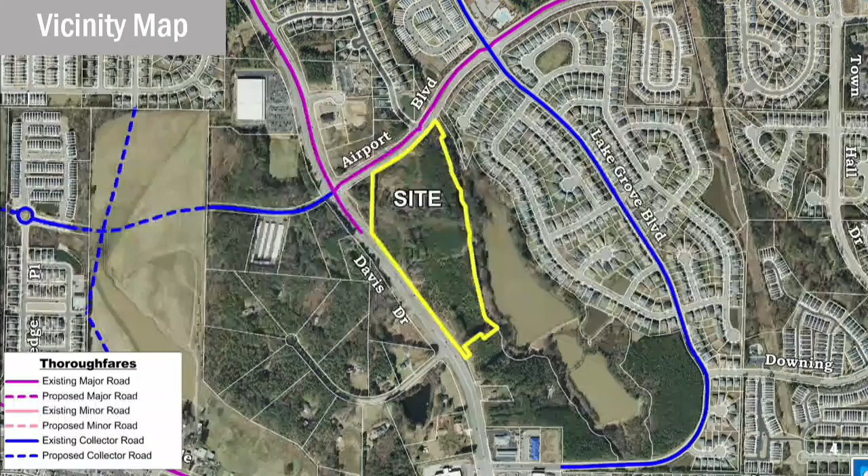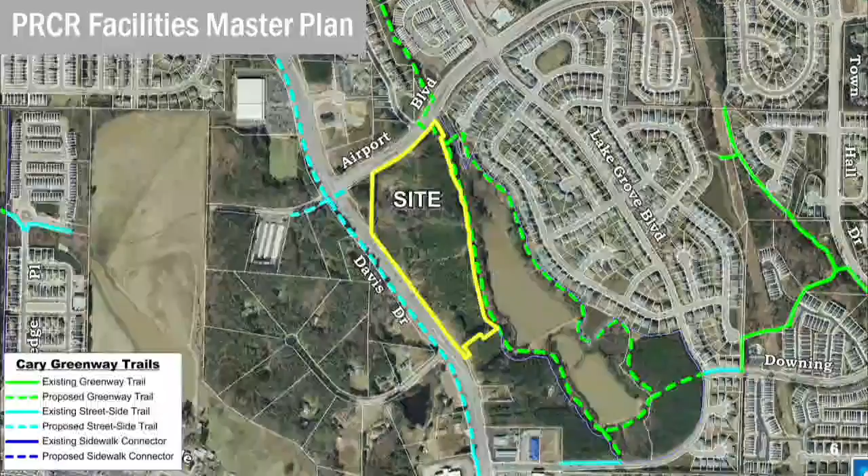The Parks and Rec master plan shows a future greenway on the adjacent property, the town-owned property. That's not constructed at this time. The site is located in the Twin Lakes PDD. The subdivisions to the east and to the northeast are also located in the same PDD.

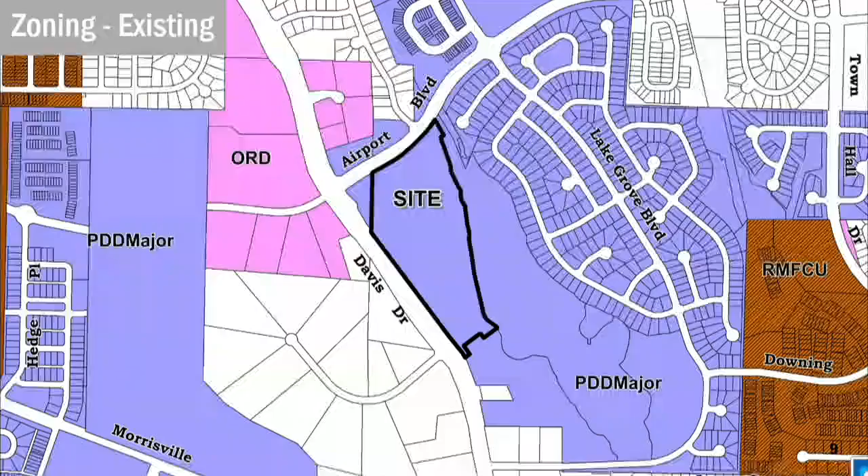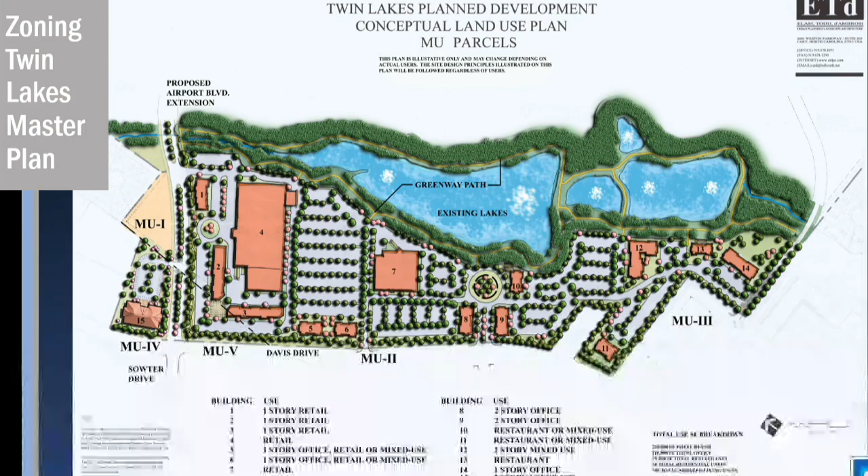This zoning designates 5 mixed-use parcels, MU1 through MU5. The subject site that we're looking at tonight is located in MU2. This conceptual land use plan suggests mostly retail for this site, also suggests some office and mixed-use space on that plan as well. This is a conceptual plan, and you will see some differences between this plan and the applicant's sketch plan once we get into that.

The PDD further outlines some use allocations up to 250,000 square feet of retail space for all 5 MU parcels, mixed-use parcels, an additional 110,000 square feet of office, and 25,000 square feet of restaurant, which it separates out from retail, is allowed in the total, all 5. No building shall have a footprint exceeding 150,000 square feet, a maximum of 4 standalone restaurants, and up to 50 apartments or condominiums, or 150 assisted living units.

What the applicant is proposing is 158,300 square feet of floor area, all non-residential. There are no residential units in the proposal. That would be 63%, slightly over, of the retail allocation from the Twin Lakes PDD if it were to all develop as retail, and right now some of the spaces are speculative. That would be 41%, or just over, of the total floor area, the total non-residential floor area permitted in the PDD. Again, there are no residential uses.

It could include up to 2 standalone restaurants, just depending on how the building is configured. PDD allows 4. And for your reference, the acreage or the size of this MU2 property, mixed-use 2 tract, is about 22 acres, which is about 56% of the total area of all 5 MU tracts.

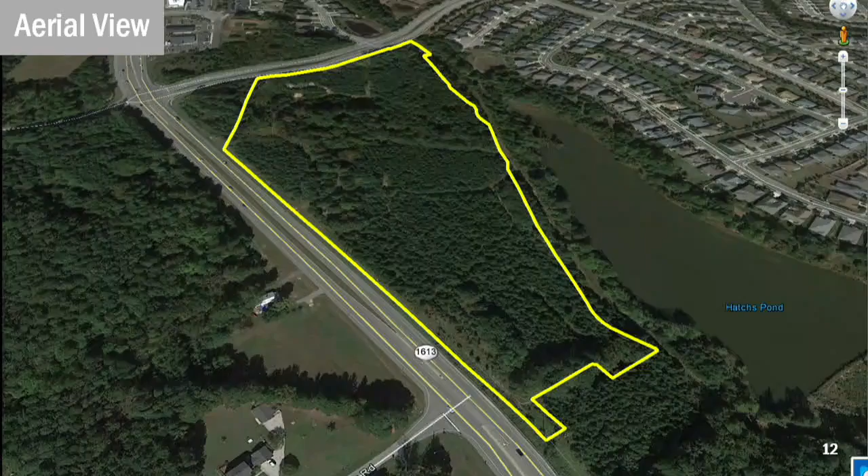Here's an aerial view of the property as it exists today. It is obviously currently undeveloped. It is very wooded, highly wooded. There were no champion trees on the property, however. You see Hatchs Pond there to the east, residential subdivisions there to the east.

A second larger view helps you give a little more context of the setting. Obviously, Davis Drive there on the west.

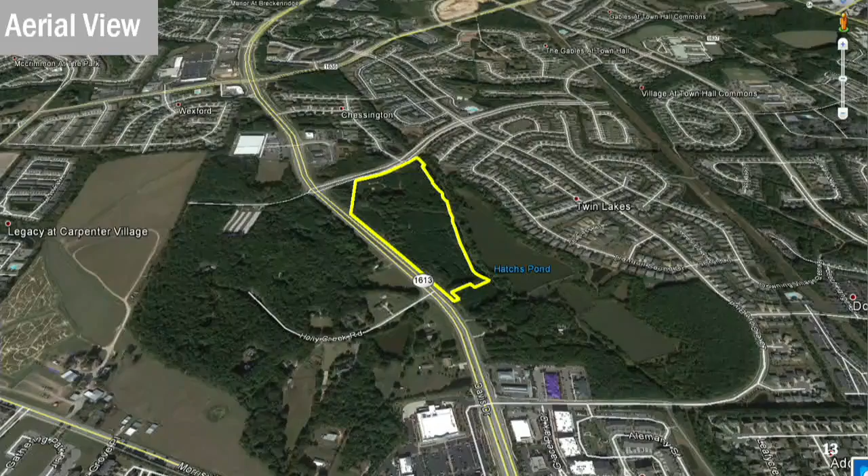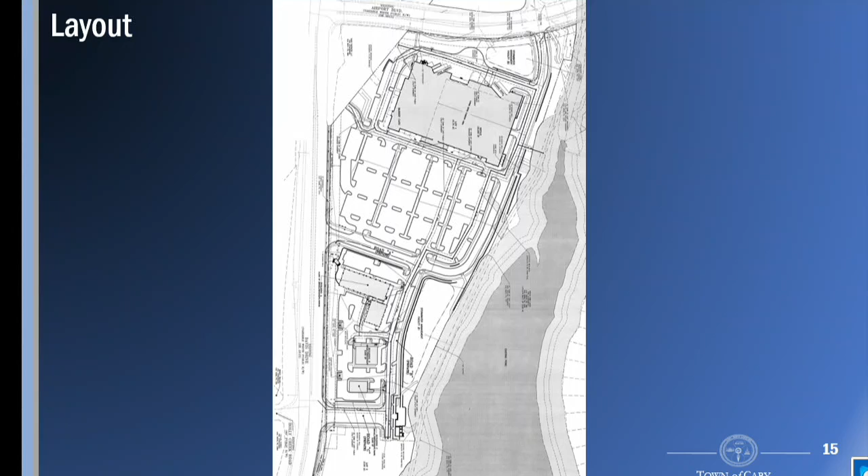Predominant building that you see up on the northern end of the property is their large scale, large retail building. It has a size of 130,000 square feet. You'll recall that the maximum building footprint was 150,000 square feet, so this is beneath that. This also contains some structured parking, has 144 spaces located beneath the building. That'd be accessed on the east side of the building. This is north up oriented.

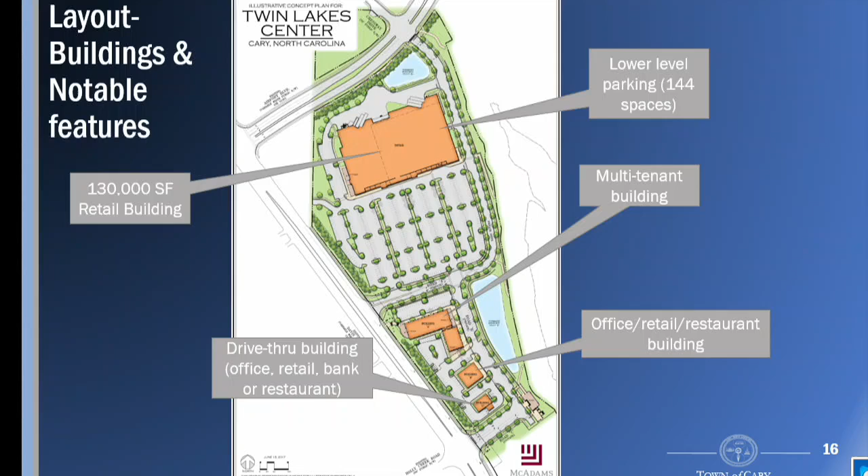Building A is a multi-tenant building. Building B is an office, retail, or restaurant building. And finally, Building C, office, retail, bank, or restaurant. Again, you can see the speculative nature of these buildings. Building C contains the drive-through, has 2 drive-through lanes.

Community gathering space down on the southeast corner of the site, and 2 stormwater control devices at either location—BMPs, or best management practices. They show up here looking like a pond, but we don't know what they're going to be yet. This is a sketch plan, so that's a detail that hasn't been developed. The engineer who drew this may know, but it's not really being considered right now. They could end up being vegetated biocells, below-grade sand filters, or a wet pond. The detail is yet to be determined, so don't read too much into their appearance on this plan.

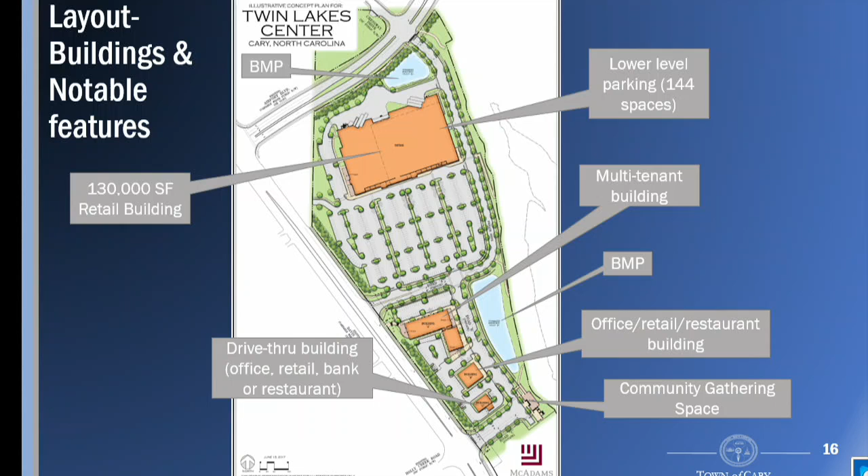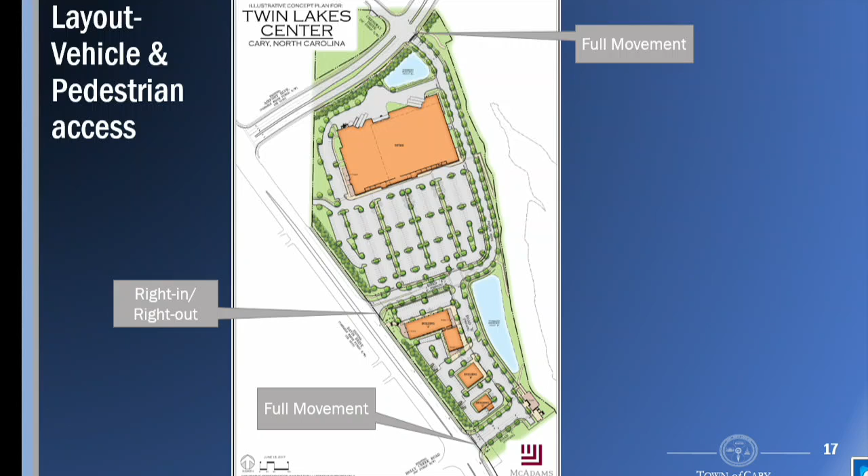For pedestrian and vehicle access, there are 2 full movement access points: one from Davis Drive and a second on Airport Boulevard. Davis Drive has a second vehicular access point, but it's right-in, right-out, since there's a median on Davis. So there's a median break for the southern access point, but not for the northern access point.

There are 4 pedestrian connections to the future greenway along the eastern side of the property, and stubs to the future development to the south. There's a vehicular and pedestrian sidewalk stub to that southern property, which is mixed use parcel 3—one of the 5 mixed use parcels outlined in the Twin Lakes PDD. The same applies to the northwest, where another stub will serve and give vehicular and pedestrian access to MU4, which I believe is also one of the mixed use parcels.

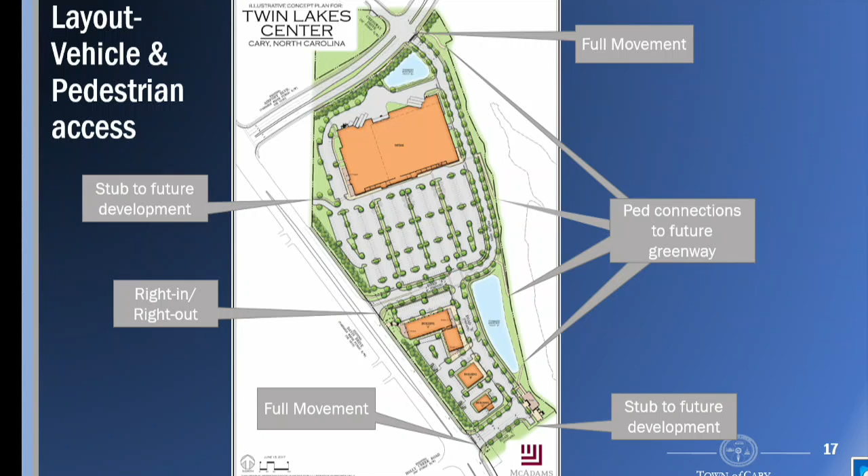Regarding architectural features, the Twin Lakes PDD calls out the need to create a sense of place. Among its several pages of design recommendations, it calls for architectural features to help create that sense of place, and even goes so far as to say repetitive use of it should reinforce it. What the applicant is proposing is an architectural feature at the community gathering area, and entrance features at the 3 vehicular entrances into the site.

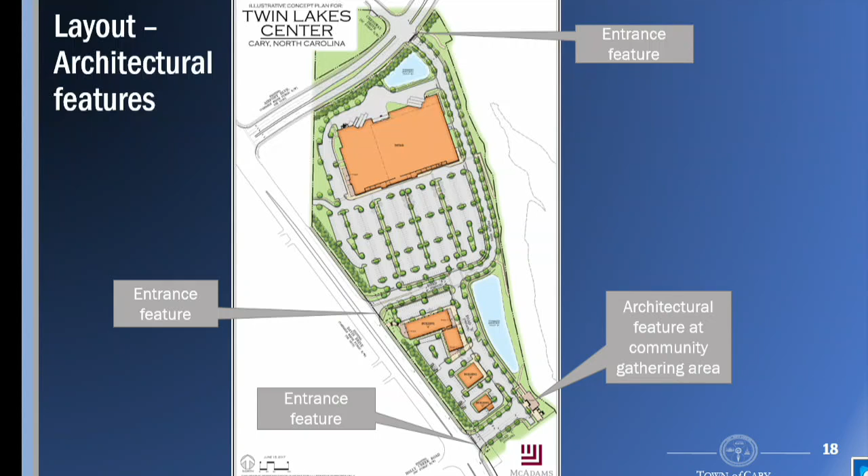That concludes staff's initial presentation. I'll hand it over to the applicant and other public speakers, and we'll return once they've finished to present our observations. Thank you, Mr. Loveland. At this time I'll call on the applicant's attorney to present arguments and evidence in support of the application by addressing the applicable approval criteria.

Good evening, Mr. Mayor and members of the council. My name is Jamie Schwadler, 301 Fayetteville Street in Raleigh. I'm with the law firm of Parker Poe, and I'm here on behalf of the applicant this evening. I'd like to thank Doug not only for the presentation, but for his work throughout this process. We've been through some changes, and we're much better for it, and I commend the staff for working through all of those with us.

I'd like to give a brief overview of the project. Doug did a great job, but the gist of this is that this is a PDD approved in 2004. It had 9 different residential parcels and 5 mixed-use parcels. Between those 5 mixed-use parcels, there was an entitlement allowing various square footages of uses to be mixed in various combinations. This is the first of those MU parcels to be developed—MU2—and the remainder are yet to be developed. So the uses you'll see here are the first mixed uses introduced to this corridor after all the residential and the rest of the project were already complete.

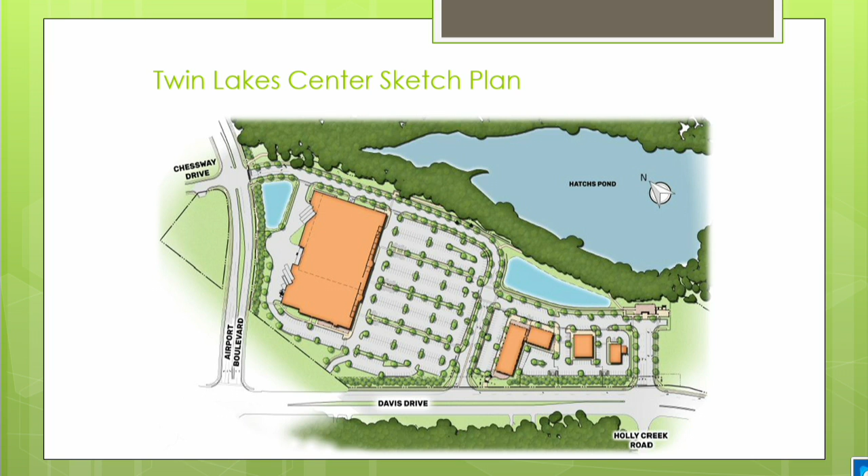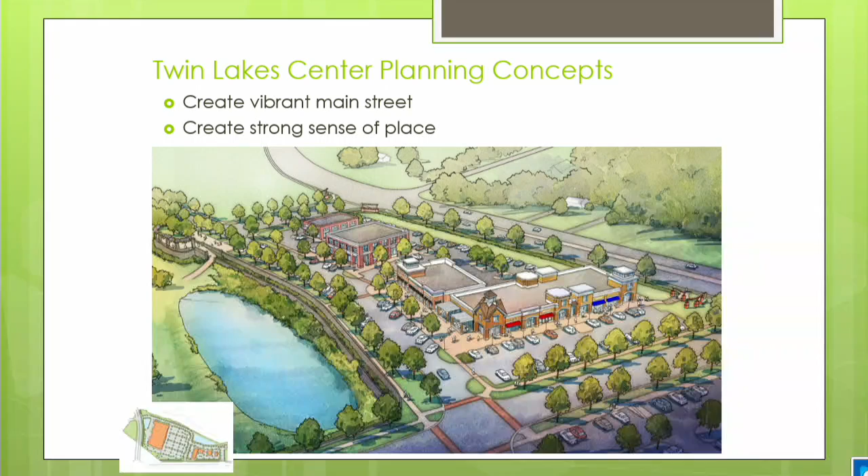These plan features are designed to respond to the goal of creating a sense of place that will enhance a visitor's experience. The Main Street will be lined with a broad sidewalk, restaurants, retail shops, and additional plazas, all oriented toward Hatch's Pond.

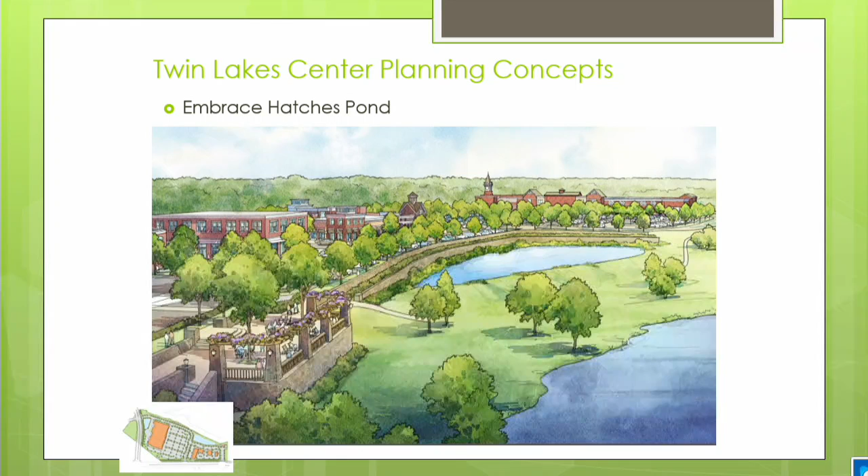Now, if you go to the south side of the project, looking north, this is a closer view of that lake overlook. In the distance you can see Wegmans, and just beyond the overlook you'll see the Main Street area. We expect the overlook to become a favorite gathering place to meet friends and family, or just to relax in the middle of a hectic day.

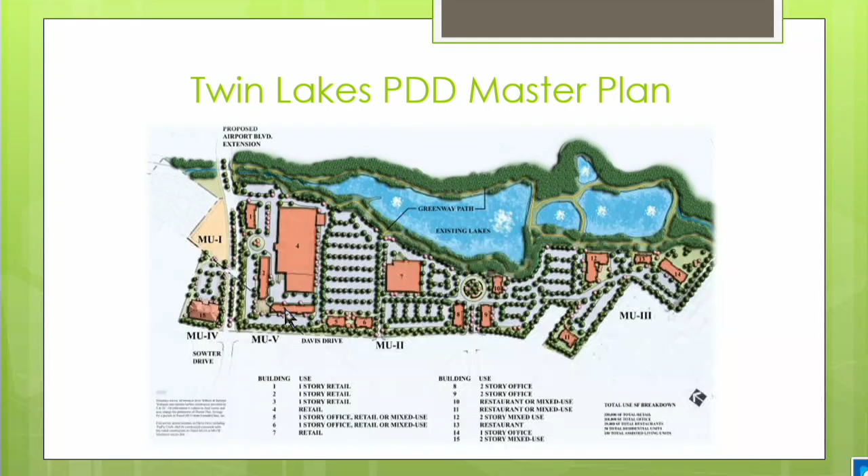Davis Drive had been approved since 2004, and that impacts a couple of things. One is it moves our streetscape back, which impacts these buildings along the frontage at all setbacks. And then there's a storage requirement for these through lanes coming out, so it impacts the ability to put the roundabout there, and moves back the intersection of the street from Davis Drive.

These are our preliminarily designed stormwater management facilities that treat both the site and off-site drainage from the roadways. And you'll notice, I don't know that this property line was established at the time the concept plan was done, but there are areas of the roadways and parking and things that overlap on what is now town property.

So we're dealing with a little bit smaller site than what this shows right now, and then when we go into phase 2, this is where there's a cell tower, so we have some more issues to deal with as we go down the road.

The other thing you can't see from this plan is that the topography of the site slopes from Davis Drive down to Hatchs Pond, going from about 16 feet of fall in this short stem of the roadway to as much as 30 feet across this area. So when we grade in and make reasonable grade for the parking and flat building slabs, the area up in front is lower than Davis Drive, and we do have some retaining walls on the back side.

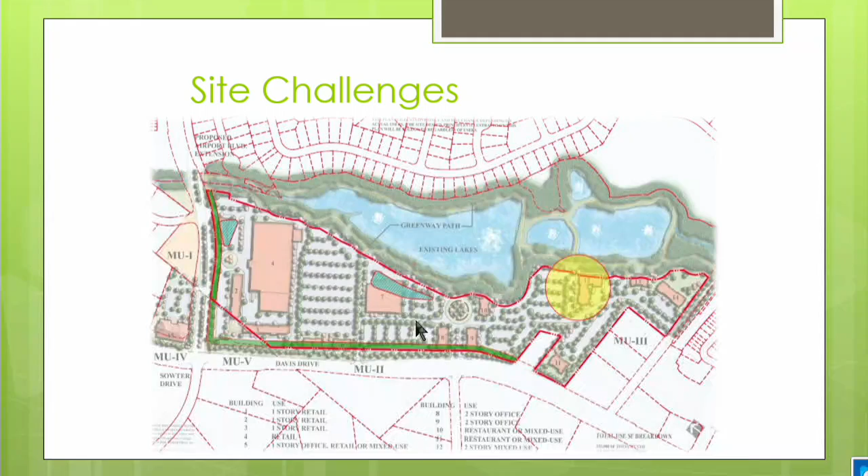Looking at them side by side, you can see that the larger anchor, retail anchor, is a little bit shorter and deeper than the building 4 on the concept plan. We needed to rotate the building slightly, and it allowed us to get access around both sides on our property, not on the town property or on the mixed-use 5 parcel, to provide the necessary emergency access fire protection for that building.

And then we have grouped the retail buildings, as Mr. Kaufman explained, creating the Main Street, addressing Hatchs Pond, and placing the overlook here, which essentially is a replacement of this roundabout open space, but overlooking Hatchs Pond and not in the middle of the roundabout.

So the consistencies that we have are the access locations. Those are fixed, we could not move those. The location and size of the large retail building is the same. Internally, we have the tree-lined streets

and sidewalks on both sides of the streets. The uses, retail, restaurant, office, are the same as what was proposed in the PDD. Public gathering spaces, we have actually 5. There's the public gathering space there, the minimum 5,000 square feet that also meets the LDO requirement. There are 3 associated with this retail building and the space associated with the market cafe.

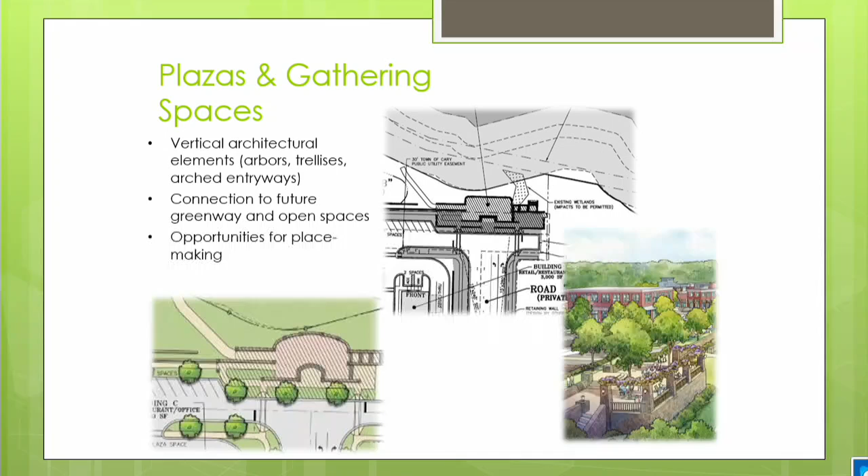There are some blow-ups of the public gathering space, and the entry feature at the right-in, right-out is connected through a stairwell down to a plaza to get into the front of this retail building and down to the main street with pedestrian scale landscaping and benches, also extending over on the north side of the right-in, right-out entrance to help screen the parking lot.

I must have skipped a slide. Let me get back one. There we go. The PDD encourages uses of plaza seating, benches, and niches to create a human scale, and as I mentioned, we have 5.

The PDD establishes the streetscape requirement along Davis Drive and Airport Boulevard of 30 feet. We are burying the underground power lines along Davis Drive in accordance with the LDO, and enhancing the streetscape behind the retail tenant to include a 4-foot graded berm and an opaque fence. The internal streets have a 15-foot wide streetscape including sidewalks, with a 10-foot landscape area between the back of curb and the sidewalk to separate vehicular traffic from pedestrians.

The PDD talks about colors, materials, and textures, identifying this as a unique place, and all of the features we've discussed — entry features, gathering space — will all be of consistent material and look.

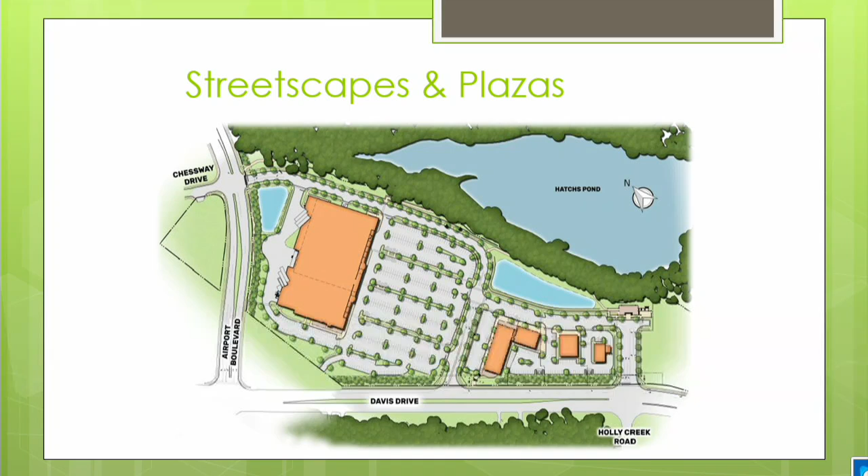Now I'll go back to the main street. As Jamie mentioned, or maybe Doug, the PDD includes 12 pages of design guidelines talking about architecture and layout. It suggests we cluster buildings whenever possible, which is what we've done here with the main street, with sidewalks adjacent to the buildings creating that main street feel. There are sidewalks on both sides of all the streets, which we've done throughout this sketch plan.

Using open space as a consistent pattern through the development, as Mr. Kaufman described, this respects the open space, orients itself toward it, and connects to the future greenway in 4 different locations. Pedestrian crossings will be marked with specialty paving to differentiate and provide further safety from vehicular traffic. This was also laid out to supply emergency access to all parts of the building, within 150 feet of the building.

So with that explanation, the plan as proposed, and as we've worked through with staff, complies with the combined requirements of the PDD, the LDO, and applicable town standards. There's one modification noted on the cover sheet regarding the stormwater pond and terracing of the retaining walls, but that's the only modification being asked for. It's in keeping with the Twin Lakes PDD, the community plan that designates the site for commercial, and also provides safe ingress and egress for emergency vehicles.

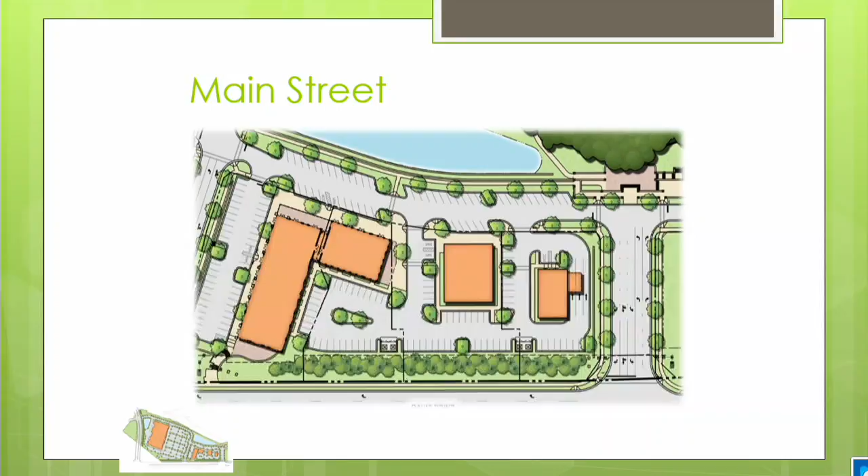Thank you, Mr. Dirks. I'd like to call my next witness, Mr. Earl Llewellyn.

Good evening. I'm Earl Llewellyn, traffic engineer with Kimley-Horn and Associates, located at 300 West Morgan Street in Durham. We performed the traffic analysis for the project. I'm a registered professional engineer in North Carolina, South Carolina, and Virginia, with 28 years of experience in traffic engineering, and have done several hundred studies similar to this. At this time, I'd like to tender Mr. Llewellyn as an expert in traffic congestion and mitigation.

First, we worked closely with NCDOT and town staff to determine the study area as well as detailed technical assumptions for the traffic study. We also met with the neighborhood community on 3 occasions to discuss existing pedestrian and cut-through issues they were experiencing. As mentioned, the project includes supermarket uses, other general retail, restaurant uses, and office. I'd note that the land uses and sizes on the site plan are actually 13% less impactful, generating 13% fewer trips than the traffic study, and it's the traffic study that determines the mitigation measures.

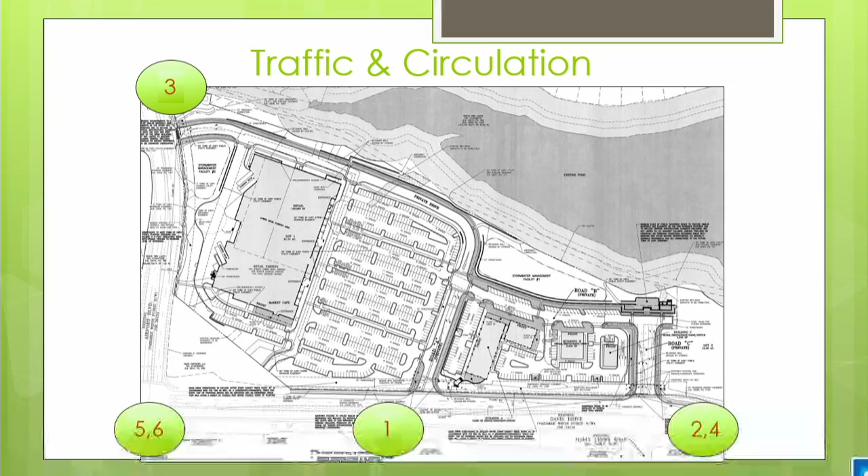Approval criteria 3 requires that the plan provide harmony and unity with the development of nearby properties. To determine this, I considered 4 criteria: is the property typical for the normal course of development in the community? Is it similar in scope and scale with other similar properties nearby? Is it well integrated into the neighborhood? And is the property type complementary to other properties in the area?

Based on my analysis of this property and the neighborhoods surrounding the proposed commercial development, and my investigation of other commercial properties in similar neighborhoods, it's my professional opinion that the plan meets these 4 criteria and provides harmony and unity with the development of nearby properties. I'd be glad to answer any questions.

Thank you, Mr. Hester.

With that, I'd like to sum up how the evidence you've heard tonight provides competent, material, and substantial evidence on how we meet the 6 required factors under the LDO. The evidence supports Cary Community Plan compliance as outlined in Mr. Loveland's report, focusing on the work, shape, and shop policies, thoroughly covered in that report. We've heard how Twin Lakes complies with the PDD itself, as well as meeting or exceeding LDO requirements for land use, pedestrian connectivity, plazas and design elements. So that covers criteria 1.

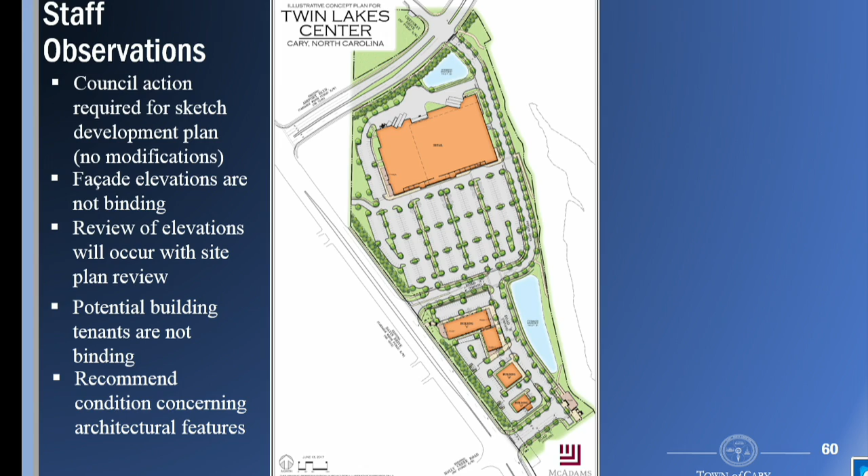Very good. We're not trying to be mean, but we've got over 60 years of experience just in the 5 of us up here, and we've been burned before. So whenever we see pictures, we immediately question, is that required? And I usually write that question down.

So now they're showing a community gathering space in the southeast corner. As Mr. Dirks pointed out, there's actually multiple community gathering spaces shown on the plan. Those are binding - the exact shape might wiggle a little bit, since this is a sketch plan, but they're going to be in that general location and that general size.

But they would have to comply with town design standards and guidelines. Correct - that's right. So while they might not be held to what they showed us in their renderings, it is still going to be Cary standards. Yep, you're exactly right. Very good, Mr. Frantz. Other comments, questions?

The only comment I would have - it's very similar to what the original PDD approved in '04 showed. However, I did like that the original PDD in '04 showed the big box building semi-hidden by the 2 smaller retail buildings between it and Airport Boulevard. I've never been a fan of putting buildings up towards the street where the back of the building faces the street, seeing the loading docks and service bays from the street - it's ugly. It is ugly, yes, I'm sorry.

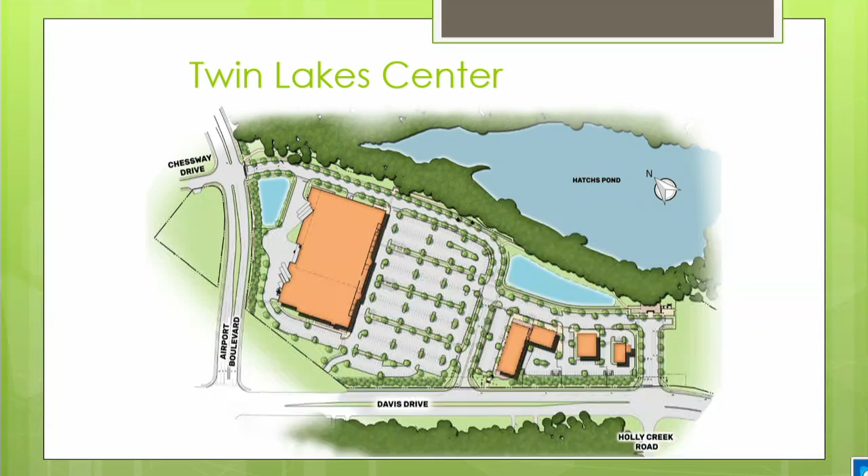I'm reluctant to take a guess on that. Can you just put up the slide that shows the original plan for the area, the side by side one? The conceptual master plan, the original PDD from '04. Give me a second, I have to remember the numbers on the slides.

The applicant actually has a good slide of them side by side, if you'd prefer to see that one. There you go.

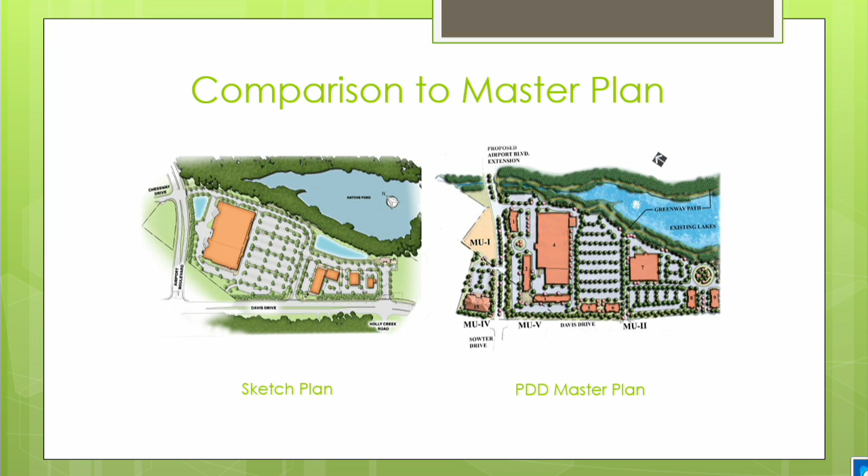Mr. Smith: we have to stay with all the things we have to consider, but I just think this is so woefully underwhelming, except I do appreciate the traffic analysis and the lights, I think all of that helps. But the question then is, what are we giving up that was part of that big picture for that area? Those are just my thoughts.

Mr. George or Mr. Yerha, either one. The traffic lights are a wonderful thing, especially on Airport Boulevard, I agree with you. Will they be installed before the development happens? I know the state has to warrant them, but I don't want a disaster happening with left turns on Davis Drive during rush hour. I'll attempt to address that, but I think your staff will require it prior to CO for any substantial portion. A small building may come online that may not necessitate it, but as soon as the lion's share of the project is CO'd, that will have to be in place.

Thank you, receiving confirmation that that's an accurate statement. So we have head nods, yes.

Anything else, Mr. Yerha? No, otherwise I'm fine with this. It complies with the PDD, complies with the LDO. I like the fact that there will be some underground parking, I guess that's one of the things we're approving when we approve this. The access points are great, I think the traffic study was well done. If one of those gathering spaces turns out to be that overlook as presented, that would be a great thing, very creative and distinctive. I have no problem with the drive-through, I guess that's another reason we're seeing this tonight. I never have problems with drive-throughs, I don't know why we have to go through that all the time.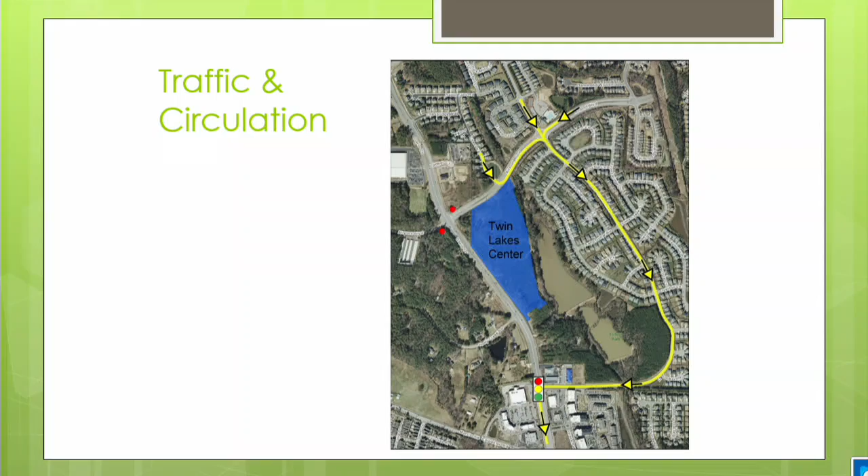But you didn't quantify the percentage of people doing that instead of turning left. You didn't do traffic counts to determine that people cut through and come out the other way. There's not a... we did a rule of thumb, looking at trip generation for the number of homes in these areas. That's sort of the basis we used, a little more than a wet finger in the wind. But we did assess there's a substantial number of cut-through traffic that would not be associated with accessing the homes in this area, per se.

So there's some offsetting things for the neighborhood, you're saying, because there's a stoplight there may be less people cutting through. Those same people are buying groceries somewhere. So is there really an increase, are they going to shop more often because it's close by? I'm trying to figure out why there's an increase because you're putting a grocery store there, or potentially a retail store. Is there going to be an increase in traffic because they're still going to buy groceries somewhere and still have to exit their neighborhood to do so?

That's exactly right. There's a case to be made that there would not be an increase. I didn't want to do a traffic study showing that there would not be an increase. I wanted to be conservative in that regard.

Okay, and if there's pedestrian connectivity, then potentially there's even less traffic, or a reduction. So I think when the neighbors point out 5%, that was a very small number, it seemed to me, and it's not insignificant, but in your opinion it was insignificant in the total number of trips in the area, right? That's what your statement of insignificant meant. But from my perspective, that number of additional trips did not cause any capacity problems. Capacity problems, okay, that was what was insignificant.